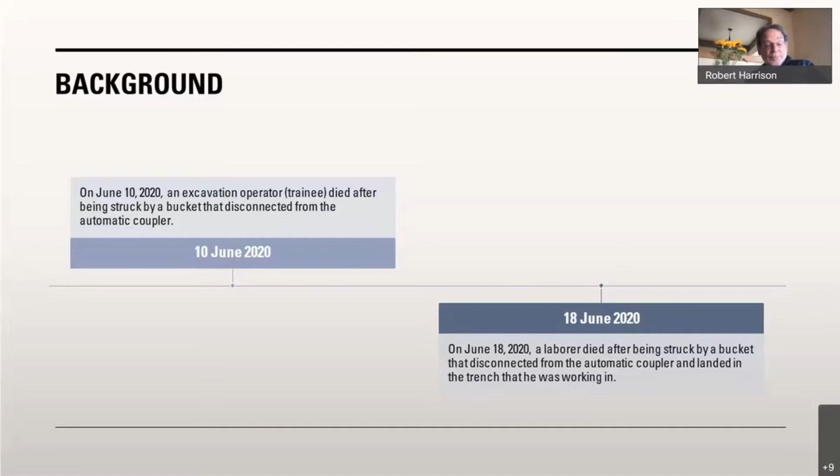The first thing that we do is go back and see if we're covering the same terrain - have there been other fatalities in connection with quick couplers? I go onto the federal OSHA fatality catastrophe website and do a search by keyword. Sure enough, there were several other fatalities, including one going back to 2007 in California. Our team was on the job back in 2007. I can't remember this specific fatality, but there were several others, including one recent one in Wisconsin.

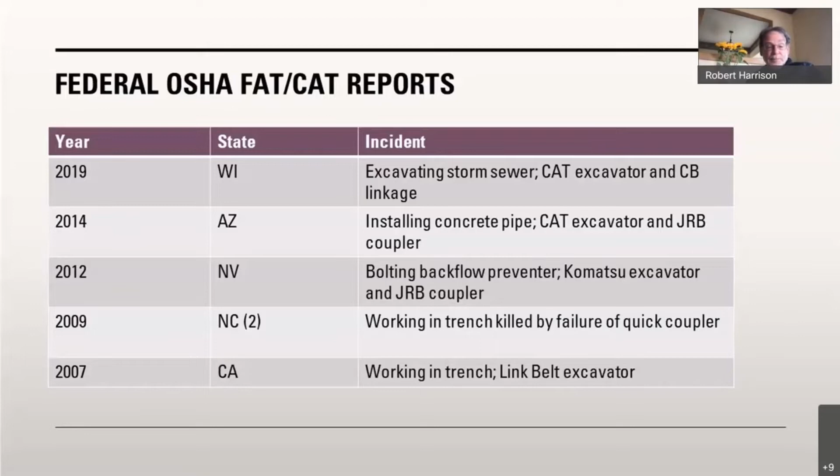There was also, by the way, the Wisconsin case. This was a Mine Safety and Health Administration investigation, so I also look at incident reports there.

So I'm going to describe the case, show you a few pictures, and ask Hank to comment, because Hank performed the investigation and was on the scene.

This was a construction heavy equipment operator, a trainee relatively new on the job. He was struck by a bucket that came loose from a quick coupling device attached to the end of a boom. He had unloaded two loads of dirt from a trench, then swung the boom of the excavator over to the side. He got out of the cab while the boom was elevated, and as he was walking towards the boom, the bucket detached from the quick coupler and fell to the ground, striking him, causing his death within a few minutes.

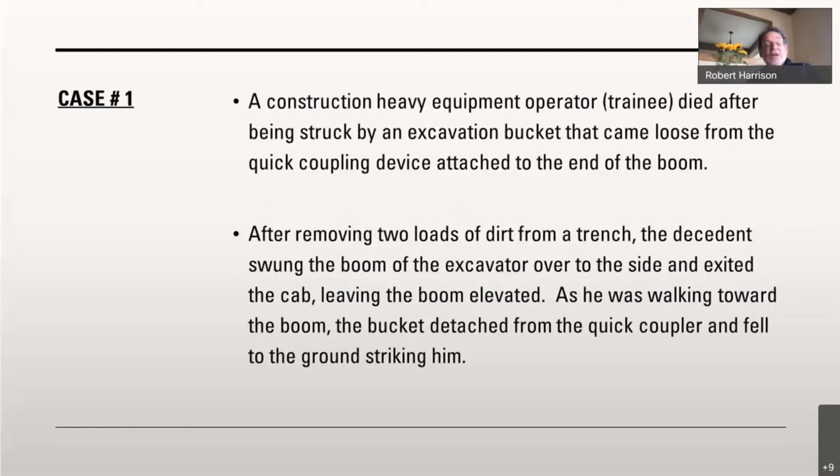Quick couplers, for those who may not be familiar, are typically aftermarket devices manufactured by various companies, installed at the outer end of a boom on construction and earth moving equipment. They're designed to get working tools or buckets on and off the end of a boom rapidly without the operator getting out of the cab or performing any manual operations.

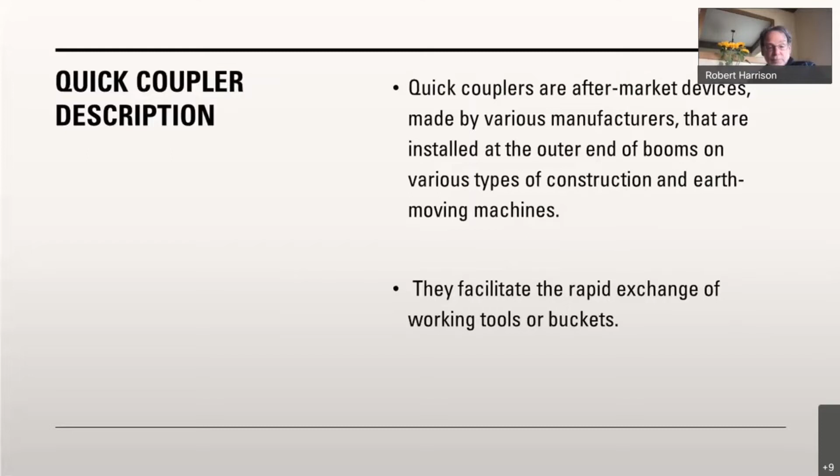They are mounted on the end of the boom by pins that would otherwise be the mounting for the bucket or attachment. They pick up and release the bucket - depending on the design of the coupler, typically with a pad within reach of the operator. There are a lot of different variations in the design of quick couplers, and probably hundreds of thousands of these operating on the market today.

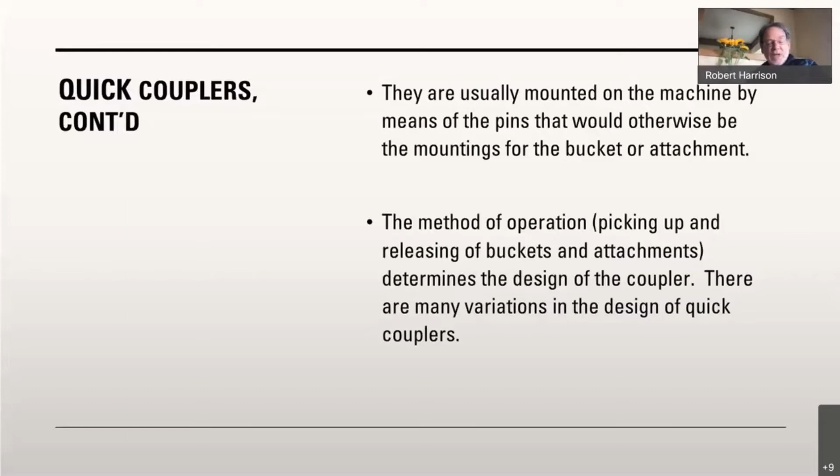Here's an example at the end of a quick coupler. Here's a good schematic - you can see they're typically using hydraulic mechanisms to lock and unlock the pins that attach to the bucket.

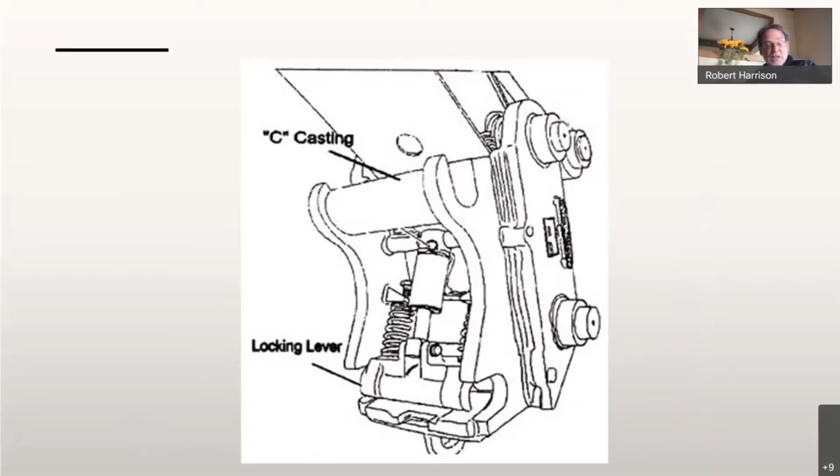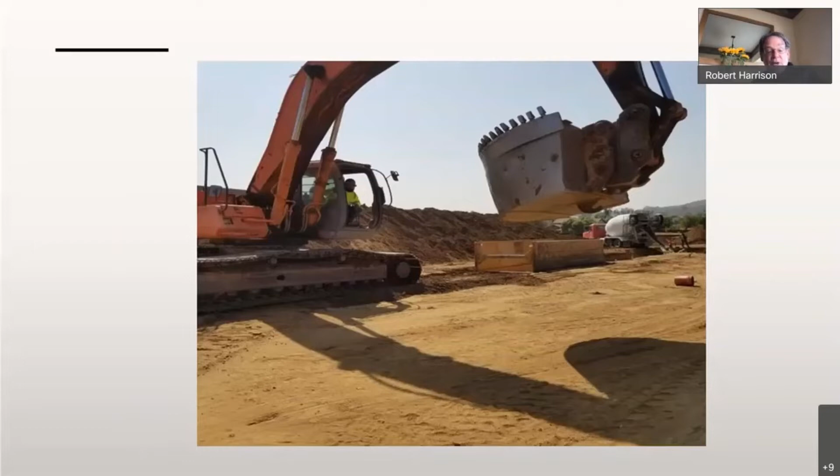Let's move to this first incident construction site. Here's the picture of the machine - you can see a very large bucket attached to the end with a quick coupler between the boom and the bucket, and the operator in the cab.

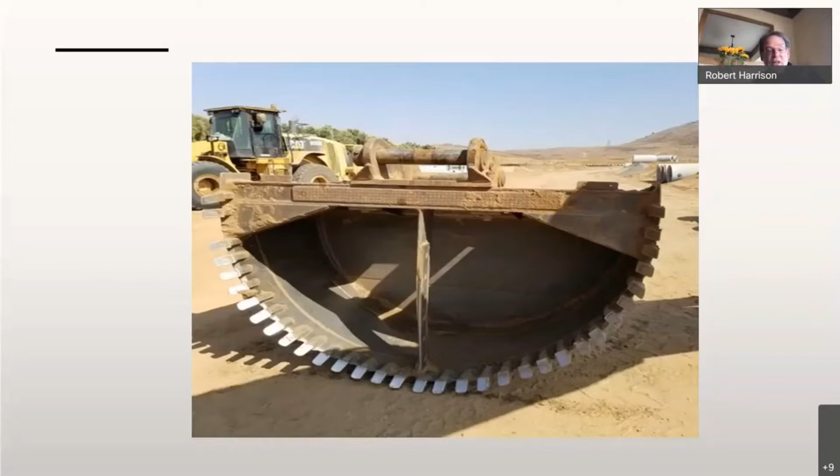Here's the size of that bucket, and you can see when that detached and struck the operator there's little chance of survival given the weight of this. Here's a picture of the actual quick coupler device attached to the bucket down below, and the keypad within the operator compartment.

Let's go back a slide. Hank, do you want to add to the incident scene here? You were out there, and I want you to add some comments.

As you can see, the control panel on the screen is the device that controlled the fully automatic type of quick coupler. When they first came out with these quick couplers, they did not have the automatic feature - you had to manually connect them. Then they came out with a semi-automatic device, which required the operator to get out of the cab and do the final connection with a safety pin to ensure the bucket or attachment was secured. Today they have what they call the full automatic connector, all controlled by panels similar to this one here in the cab.

The operator simply pushes a button, a hydraulic device locks it in place, and a light or bell indicates whether it is connected properly or not. If for some reason during operation the attachment comes loose or jarred, a warning should appear on this device as well, usually as a blinking light or a bell or a ring of some sort. Everyone has their own different types of panels, but they're all similar as far as operation goes.

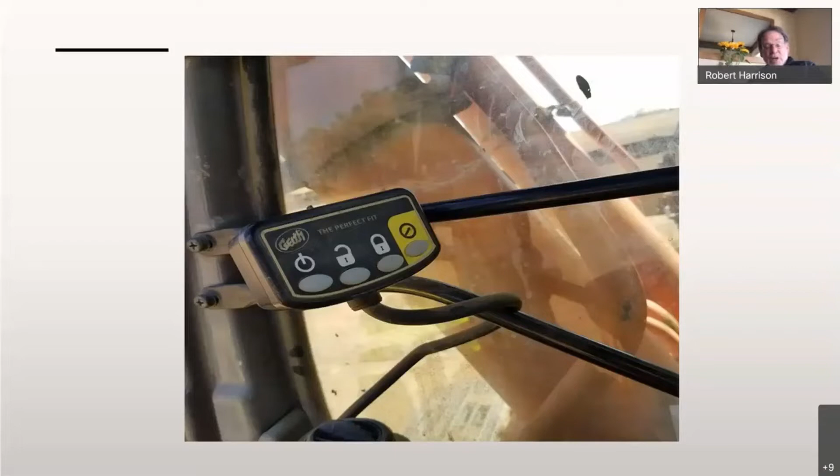Thanks, Hank. And this was, as you implied, an aftermarket device system - electrically operated with hydraulic controls. Exactly.

So case number 2 was a laborer working in a trench, and he was struck by an excavation bucket that came loose from a quick coupler. The operator of the excavator was curling the bucket into the boom when the bucket came loose, hit the ground, and bounced into the trench where the victim was working.

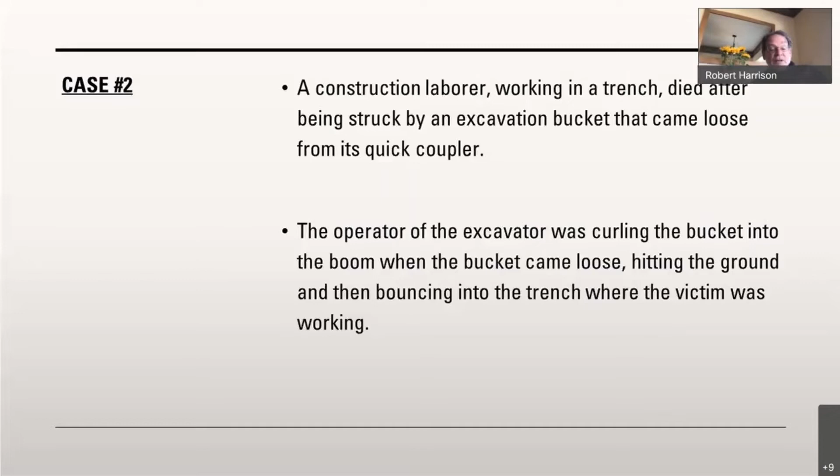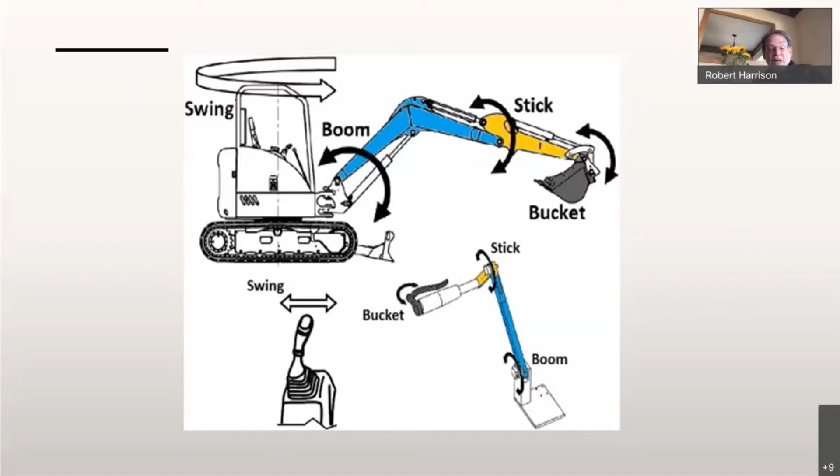Next slide. Again, another schematic showing you the excavator, the boom, the bucket. Next slide. And here's a picture of the excavator with the boom and the bucket attached.

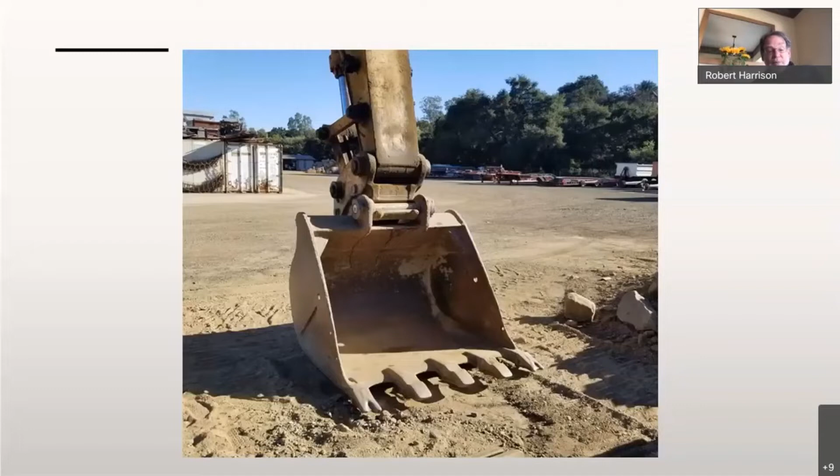Next slide. Again, a very large bucket. You can see the quick coupler between the boom and the excavator on top of that bucket. Next slide. And now you see pictures of the incident scene. Next slide. I think we get a better view.

So you can see the excavator was on top of this trench, and as the boom with the bucket was swinging over the trench, that bucket detached, and the victim was working in the bottom of this trench, and the bucket came crashing down on top of him. And what you're seeing in this photo is the rescue getting the chain attached to that bucket and removing it from the trench.

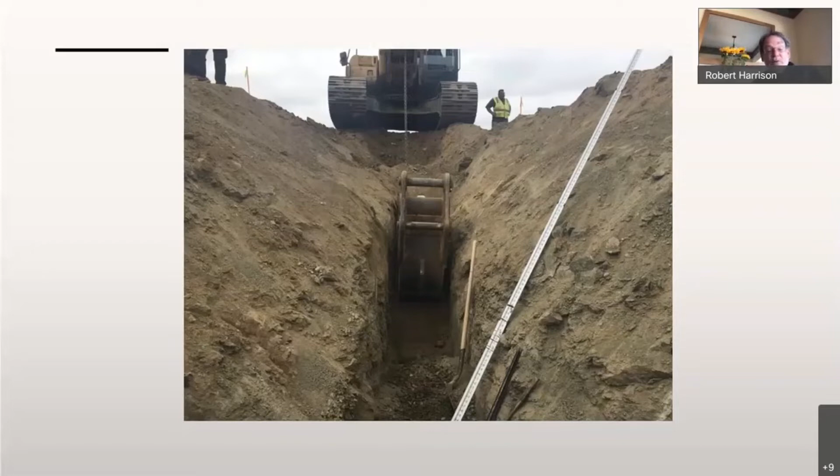Next slide. This is the inside of the cab. You can see another keypad device that's used to attach and detach that bucket. Next slide. Let's go back. Hank, you want to comment on this case?

Well, yeah, as you can see, this particular device is on a cat crawler type excavator, and so everyone has their own different design, if you will, but the operation is very similar. That keypad, even though I wasn't able to get a better picture of it, is a push button type of device similar to the other one, whereas the operator, all he has to do is literally push a button to activate the controls of the quick coupler.

Okay, next slide. So let's finish. So what went wrong here in these cases? What's the underlying or root cause? What's the prevention? What can we do to prevent these and educate operators and workers on these sites?

So first of all, I think in the first case, it's apparent, hopefully to all the listeners, that operators should always lower the bucket to the ground before exiting the cab. And in the first case, it was unwitnessed. There was another manager, supervisor, but the reason why that operator got out of the cab with the boom elevated is really still unknown to this day.

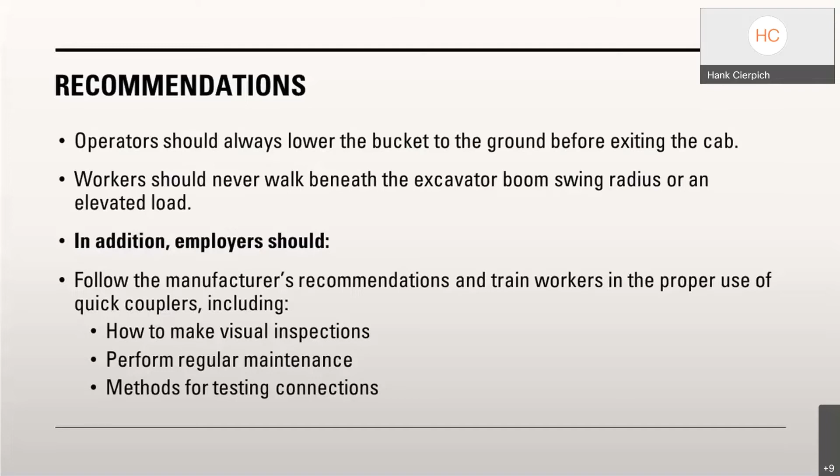Thank you, Hank. I pray that none of these happen again, but there is a definite issue here that needs to be corrected. Thanks so much, Hank.

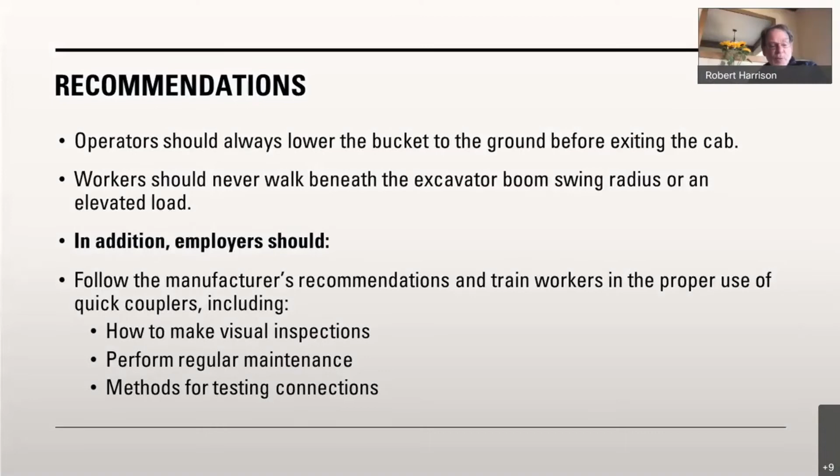I think I had just one more slide, I'll go quickly. We also had recommendations on manufacturer-approved compatible attachments, as the issue Hank mentioned about engineering and design of these devices, and the retrofitting issue. But I'm sensitive to the fact we have a lot of other great presentations, so I'll end there. I want to thank you, everybody.

And there was one comment in the chat, yeah, trench box. Yeah, there wasn't a trench box, Aaron, and we had a lot of discussion about whether we would make other recommendations about excavating and trenching. Yeah, there's a lot of issues here. There were other violations, you're absolutely right, but they weren't directly related to the incident. That's why we never brought them up. So thank you, everybody.

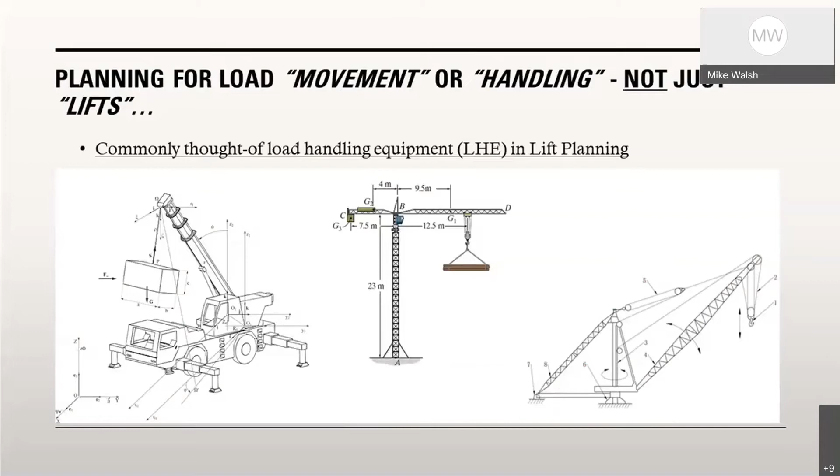But we also get into a wide variety of other lifting devices now, load handling equipment. This spans anything from gantries, tuggers, jack and slide, where you've obviously got line of fire issues, to the use of SPMTs, self-propelled modular transports, and heavy haul for load movement and transport within a project, not just between projects.

And even down to something as simple as craft rigging, or in some places referred to as bull rigging, where we're using hoists and chain falls. Again, we're looking at load movement, not just in a vertical move but also the horizontal elements that come into this, and combined, there are safety factors that need to be considered and addressed.

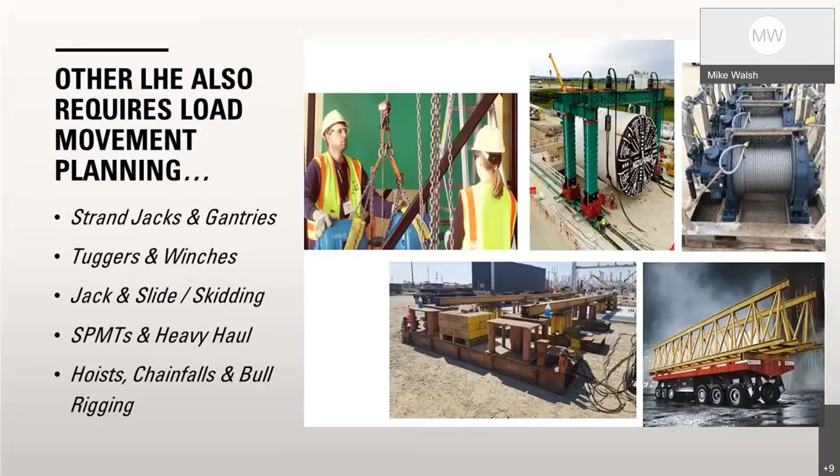As we saw with the tragic results with Hank and Dr. Bob's presentation, excavators are being used now as load handling equipment. Telehandlers, forklifts, all of those are involved.

And even if you take a look and consider a concrete pump, while it's not necessarily lifting, it is placing material. You have a boom that's involved.

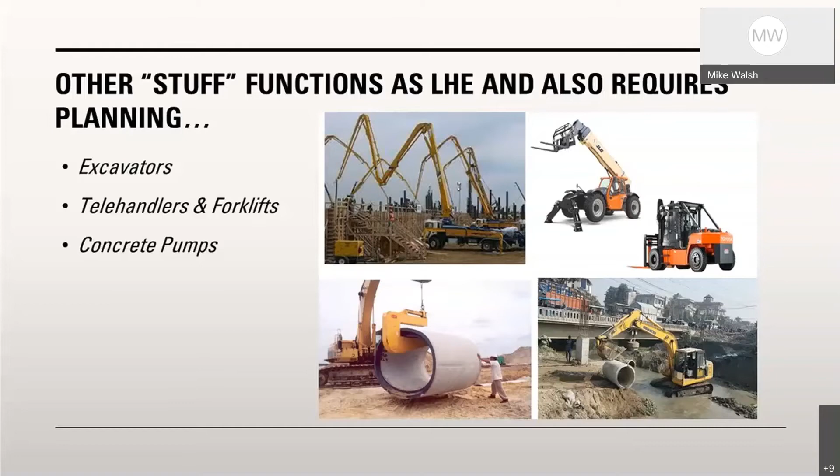So you've got overhead considerations in terms of overhead power clashes or structural clashes, boom clashes between pieces of equipment, and environmental considerations from ground conditions, ground stability, or if you're working on any kind of an elevated deck. All of these need to be evaluated and need to be planned as part of the load movement activity.

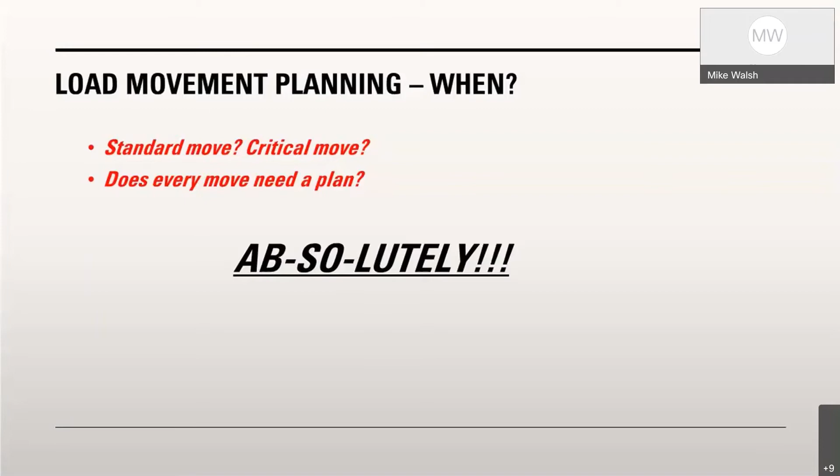So to mitigate risk, we're looking to pre-plan. We want to actively investigate and assess ahead of time. So this is getting out ahead of what the work activities are, regardless of how in-depth the planning happens to be ahead of time and how well engineered and documented.

Get out in front immediately prior to starting the work. Look for changes in the environment. Look to inspect the equipment and load handling devices that are going to be used and the loads themselves, and make sure that you don't have anything that has materially changed from your plans.

The next step is also communicate, and this is before, during, and after—postmortems on these, after action reports. Not just to look at what went wrong, but what went right and how to propagate that down the road. And then also, last but not least, actually do what you say you're going to do. Execute. So follow the plan and execute with that.

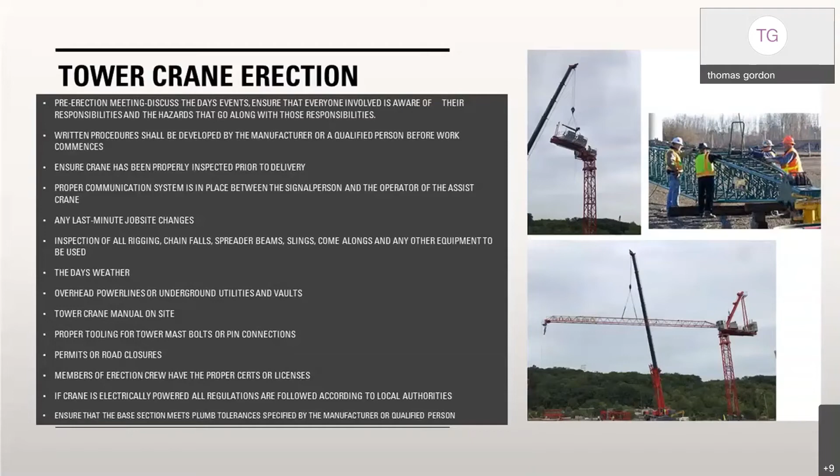It's kind of like hanging wallpaper. If your first piece is crooked, everything after that is going to be a mess too.

Operation. Before the crane will actually be put to work, there'll be a load test performed, as per the manufacturer's specifications, or if a local authority has their own rules or regulations put in place for that.

Shift inspection should be performed by the competent person. Operational aids, safety devices, and the control mechanisms are only part of the shift inspection. OSHA's 1926.1412 gives you a whole list.

The operator must not engage in any practice that diverts his attention. Cell phones, that's the major thing right now. Weather conditions should be constantly monitored.

You could be the operator climbing up in a tower crane, and in the morning it's sunny out, and in the afternoon it could start snowing, and your descent out of that tower crane could be incredibly dangerous because of ice accumulation on the ladders or the decking. So constant monitoring of the weather is very important when you're on a tower crane.

Constant communication, again, between the signal person and the operator. A pre-shift meeting should occur every day so that everybody knows what the day's operations are going to be and what their responsibilities are.

Safety devices and operational aids should not be a substitute for good judgment and safe operation. Don't think to yourself, oh, don't worry, I got the anti-two-block up there, they'll shut me off, I don't have to look up. There's a lot of these different limiting devices that stop swings and things like that. Don't ever be led into a false sense of security that an electronic device is better than you actually paying attention.

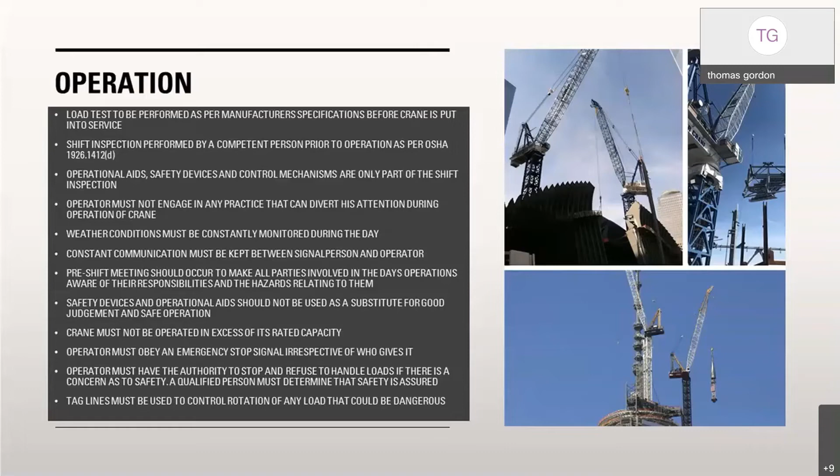Always obey an emergency stop signal, irrespective of who gives it to you. The operator has to always have the authority to stop and refuse any pick if it's a concern to safety. A qualified person should be able to determine that safety is assured and the pick can proceed. Tag lines must always be used to control the rotation of any load that might be dangerous.

Disassembly of the crane. A lot of times you'll hear people say, oh, disassembly, all you're doing is just doing everything backwards, do it in reverse.

Unfortunately, it just doesn't work that easy. There's a lot of times where you'll be putting a building up, a tower crane may be up for 6 months, 8 months, and the access roads and job site logistics could have changed. Ways that you brought material in before, or brought crane parts in, may not be available anymore. The structures that weren't present before the erection of the tower crane are going to create their own set of challenges to taking that crane down.

The tail swing of the tower crane could affect the ability to jack the crane down to a serviceable height so that your assist crane can actually reach it. A lot of times the crane has to be locked off at a certain position, and you can't swing 360 degrees anymore.

All the work during a disassembly is done at extreme heights, so you have to be extra careful with everything. Pre-shift meetings should, again, always take place before the work begins.

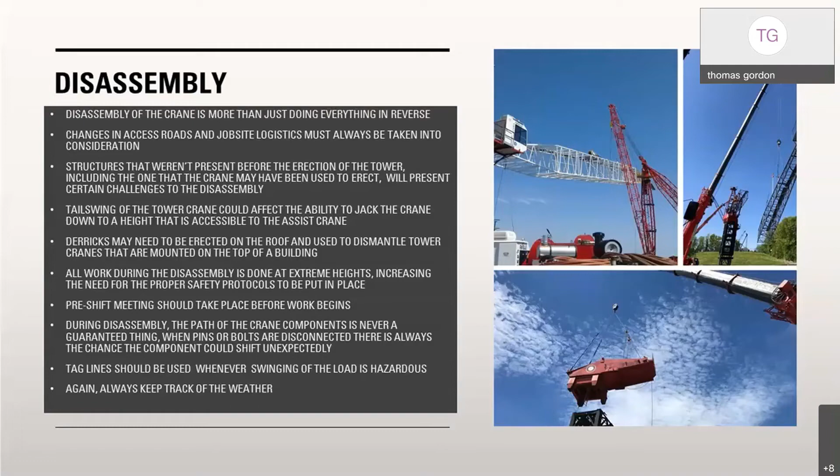That's the reason taglines should be used whenever swinging of a load is hazardous. When you're not exactly sure where that load is going to go, you should always have some taglines attached. And again, always keep track of the weather. The same issues you would have had during the erection and operation of the crane, you could run into during disassembly. That's about all I have.

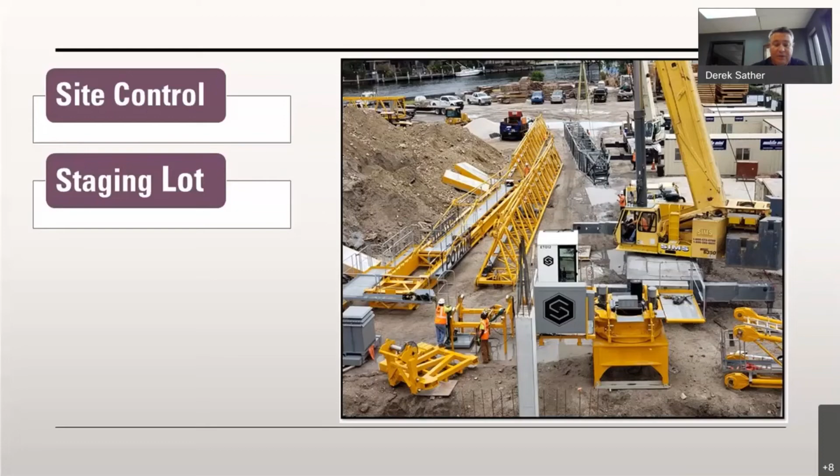Here's another crane, a different project, but I wanted to talk briefly about site access and public access. If you're putting a crane together, there's a very large fall zone, a potential hazard. On the adjacent building here, when people enter the site, they're going to be walking directly under the tower crane. This created a large problem for us because this was their only way in and out of the site.

Another issue on a project I was on as a crane operator: we were at a VA hospital, and just to get the pieces in to assist the crane, we had to disrupt the traffic around the hospital. Those are very unforeseen problems, trying to navigate a large tractor trailer through a parking lot or things of that nature. And then you have individuals going from their car to the door.

I love my veterans, I love them to death, but if you put some tape up or barricades up, they're going to go from their car to that door no matter what it takes. Remember, people will drive through an MOT setup, or climb through the tape or barrier, whatever it may be. So having some extra bodies involved with controlling traffic and doing the best you can will minimize the disruption as you're putting these cranes together.

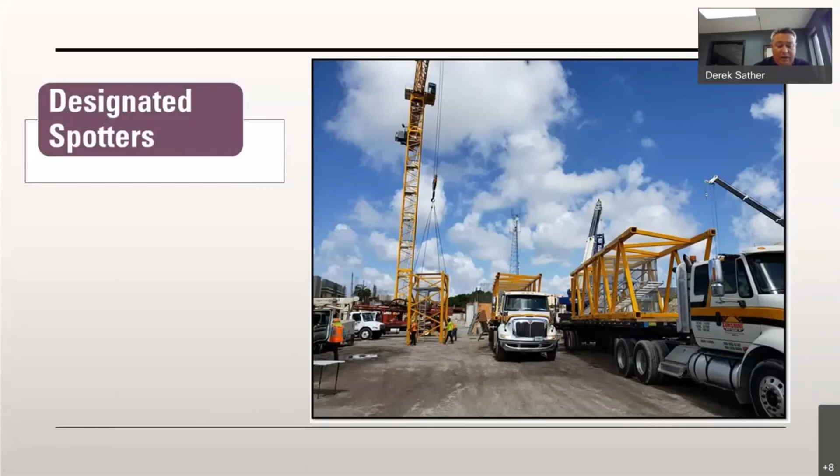So please make sure there are enough designated spotters. Because if you say you're my spotter and then they get hung up working to trip a piece or land something out of the way, and those trucks are trying to get off the road to stop creating that hazard and mess, then things start to fall apart. Make sure you have enough spotters and enough control measures for the trucks, the traffic flow, and things of that nature.

The last thing I want to talk about, and it's already been mentioned more than once, is taglines. I've seen multiple times where the tagline tied off to the object was not sufficient, not strong enough, or the knot that was tied failed, or maybe both. We need to understand that the jib section on this crane he's tied off to may be a single section 200 feet long, or multiple sections of 150 feet long. If that object can strike the crane that's hoisting it, that's a major deal.

Everybody needs to understand we need multiple taglines on this object, because you can't push a tagline. I know it seems simple and fundamental, but once that piece is in the air and everybody's staring at each other because they've somewhat lost control, it gets out of hand. So we need to make sure, one, the taglines are sufficient, and two, that we tie them off to something that's going to control the load.

Because if the wind gusts, I've seen, and I'm sure Mike and Tom have seen this too, people going water skiing across the job in their boots, because the wind is pulling them and they cannot resist the tension. We just need to make sure to tie it off to a column with a half hitch and let it run through, or a forklift or something of that nature. Just make sure an individual is not trying to hold the tagline by himself, because he will not be able to withstand that tension.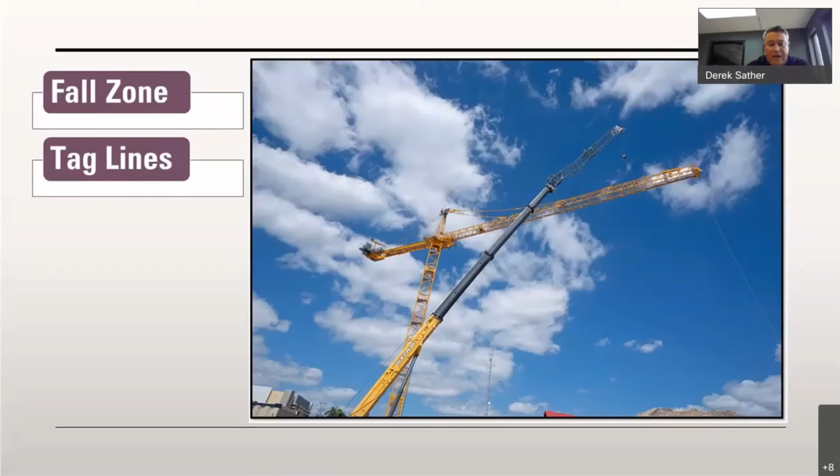I'll go over those first. This one is probably best for Dr. Bob and Hank. The question is, how effective are proximity alarms in preventing struck-by incidents with heavy equipment? I know our topic wasn't directly on that, but can you provide some insight?

I personally have some experience with both devices, and they're only as good as how they're set up, and they can be manipulated, and they can let you down. I wouldn't think of any of those devices as a total fail-safe, I'd run it as an operator aid, a backup to your normal plan. I've seen where they have let people down, and where they were not programmed correctly either. And it wasn't just for two cranes colliding, it was for prevention of power line contact on a site.

Yeah, I would agree with Derek on that. There's other things, with the cameras and so on, where you start to get into a little bit of information overload for the operator, where he already has two screens he's watching, and you just added another screen. And in some cases, like Derek was saying, you get a false sense of security there. I really don't think there's enough data to prove that they really are an aid. If it's just something extra you want to throw on, that's fine, but I don't see it's been proven to be an operational aid or anything like that.